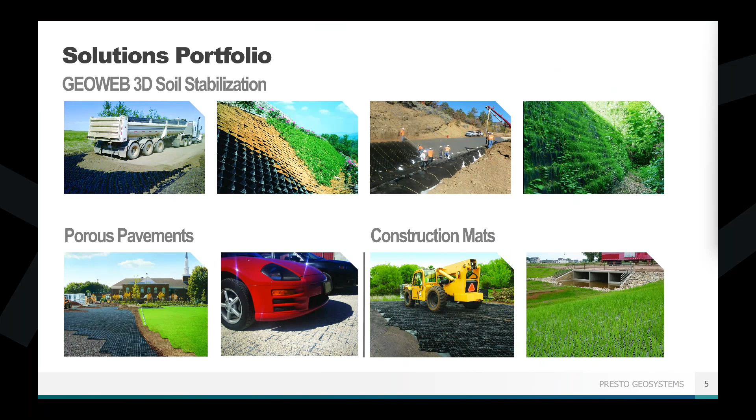So I want to talk a little bit about GeoWeb geocells and how they function, how they're going to work for what we're trying to do here. The GeoWeb system has two main characteristics, and those include the cell diameter and the cell size. The cells come in three diameters, basically a small, medium, and large. The cell wall heights are available in 5 different depths: 3, 4, 6, 8, and 12 inches. The actual cell size and cell height that you choose are going to depend on your specific project details and your site conditions.

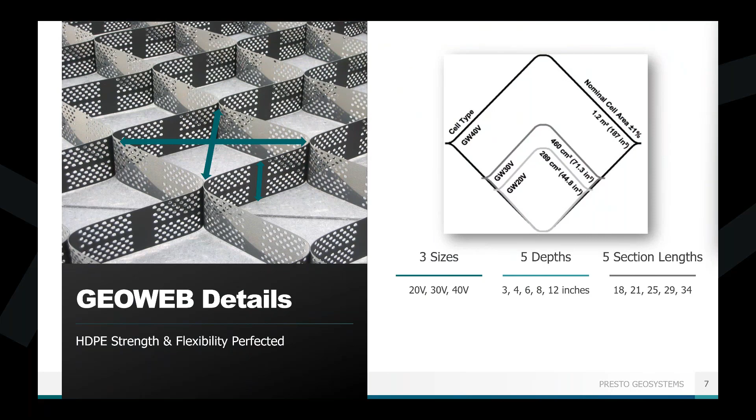Presto offers a free evaluation service, which includes your written summary, calculations, cross-sections, specifications, and other supporting documentation, regardless of your project size. This evaluation will help determine the appropriate cell size and depth for your project. To ensure your project success, we really strongly recommend against using things like standard tables or graphs. Sometimes you might have seen those out in the world, and they're a decent representation, I suppose, but they're just not very specific. Because each project is unique, especially when we start talking about having flow velocities over the system, it's really important to make sure you get one that is going to work for your site and your conditions and not just sort of hope for the best.

Something else that I want to point out about a geocell is going to be the ultrasonically welded seam. This is basically all of the connecting points of a geocell wall, and it's going to be crucial to the functionality of a geocell, how it's going to actually hold itself together. The stronger the seam strength, the better the geocell's performance is going to be. GeoWeb panels are made from 100% virgin high-density polyethylene, HDPE resin, providing the strongest wall strength while maintaining semi-rigid ductile properties.

If a cell wall is too stiff, if it's not ductile enough, if it can't move and flex, it can overstress those seams and potentially cause seam rupture, which is a project failure, something we're all hoping to avoid.

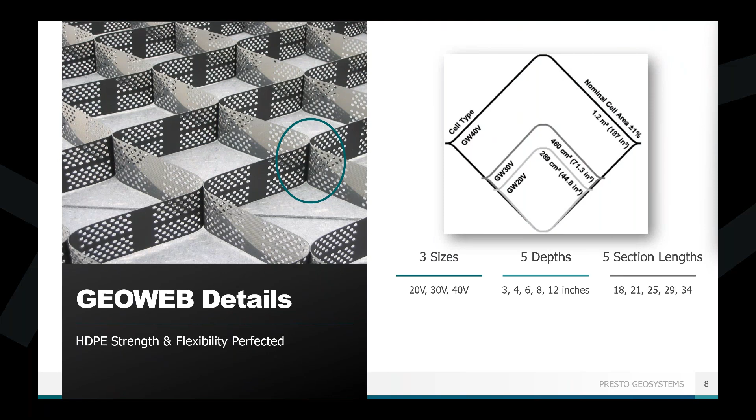So I mentioned two characteristics. The second one is actually not the panel itself, but what you put into it, the infill material. There are four main types of infill that can be used with the GeoWeb system, and what you choose is going to be based on the project type and the required protection you are looking for. Your infill types include coarse sands or granular material, topsoil, crushed aggregates, and concrete.

This will often allow for the use of recycled or on-site materials, so you can potentially reduce or even eliminate the need to import fill to your site. We can work with you and review on-site gradations to determine the most cost-effective infill material, and we'll include that in the project evaluation service that we offer.

All of the infill types can be used for the channel protection system. When used in channels, concrete is best for very, very high flow rates, which we're going to see in a little bit. Otherwise, aesthetics is probably going to be the driving factor in whether you choose between topsoil, concrete, or aggregate.

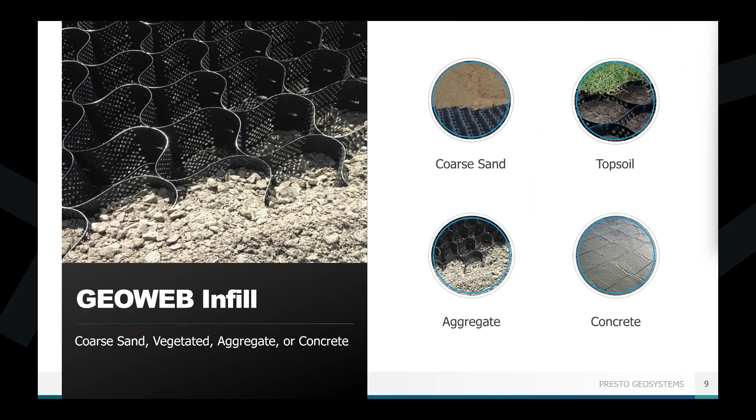GeoWeb, as I mentioned, is manufactured with a proprietary blend of high quality virgin HDPE resin, and it has proven its durability over the last 40 plus years. GeoWeb does not contain any fillers such as calcium carbonates, recycled materials, polymer alloys, anything like that. The GeoWeb system is designed to last over 100 years, with lab testing showing it can withstand up to

149 years before any carbon black degradation, even with 24-hour sun exposure. Obviously you're not seeing the sun for 24 hours a day, and we haven't quite gotten to 149 years yet, so we're working on that, but we really do stand by our data, ensuring that you can confidently build with materials that you can trust.

We are sure that the materials that we offer you are going to do what we say they will. The GeoWeb system and all of our accessories are 100% made in the USA under strict quality assurance and environmental control processes. They comply with all the requirements in the Build America, Buy America, and the Infrastructure Investment and Jobs Act. So if you are looking for federal dollars for your project, or need a certain amount of material made in the USA, all of our products and accessories meet those standards.

The first one is the Atra Key, and it is a crucial component for a fully integrated system. Atra Keys connect GeoWeb panels into a single system that covers your entire project area and significantly speeds up your installation time. Made from that durable HDPE plastic, they will last the lifetime of the project. Atra Keys ensure that the panel remains securely connected and that the GeoWeb system will not fail under anticipated loads. Their specific engineering values guarantee that the system has durability over time, avoiding the corrosion you'd see with metal staples, the failure of underperforming zip tie systems, all of that stuff you might see on competitor GeoCell offerings.

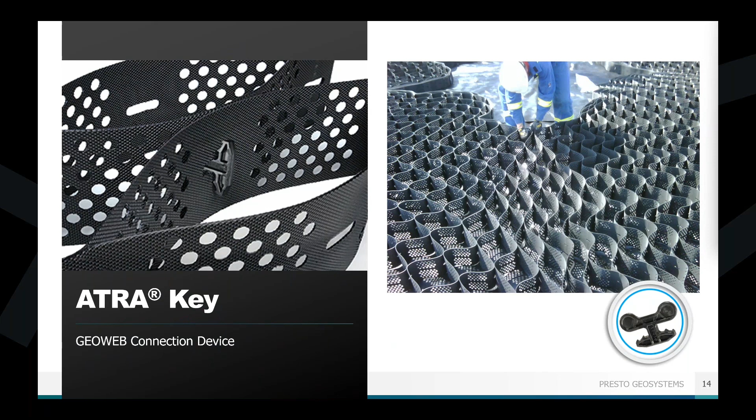We also want to look at anchorage for what you're doing with the GeoWeb system. If the GeoWeb panels are laid flat, anchorage is not really necessary because the weight of the infill materials holds everything in place. However, as your slope angle increases, you have to overcome friction, and you want to make sure everything doesn't just slough to the toe of your slope.

So anchorage is necessary. For shallow slopes, think a 2 horizontal to 1 vertical, around 26 degrees or shallower, you can use stake anchorage. We have two options: your standard steel rebar, or a stake made of HDPE, the same durable plastic material that the GeoWeb panels themselves are made of.

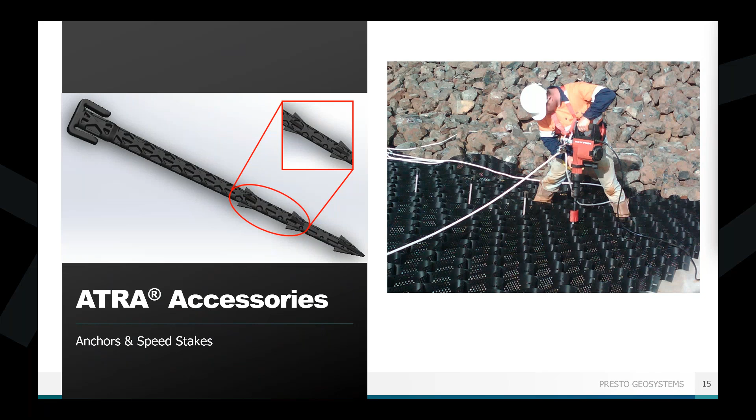Now you sometimes are going to have steeper slopes, steeper than a 2 horizontal to 1 vertical slope. You'll have other options, but you also might be putting your GeoWeb system over a geomembrane liner, something you don't want to puncture, or maybe you're in a sensitive environment where you just don't want to damage the slope face at all.

All totally valid reasons. Our second anchorage option is to use tendons. Tendons are a way of anchoring the GeoWeb system only at the crest of the slope, at the top, without doing anything on the slope face itself. So especially if you're over a liner you can't puncture, this is a great way to protect that liner without any puncture marks.

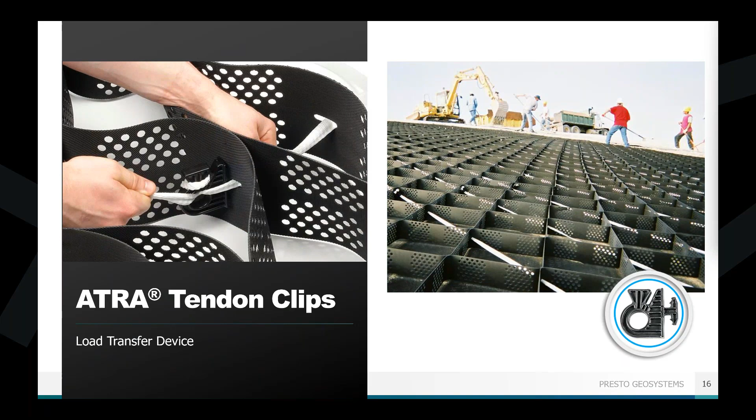There are two ways of building up the GeoWeb system on slopes and channels. The first is what we call a single layer system, where the GeoWeb panels are laid directly on the channel bottom, on the side slopes, or maybe just the side slopes themselves, and then filled in with your desired infill material. This is good for areas where the slopes are less than 45 degrees, a 1-to-1, 100% slope or shallower, as long as there's room for the footprint of the channel itself. This is probably the most efficient way to protect against erosion.

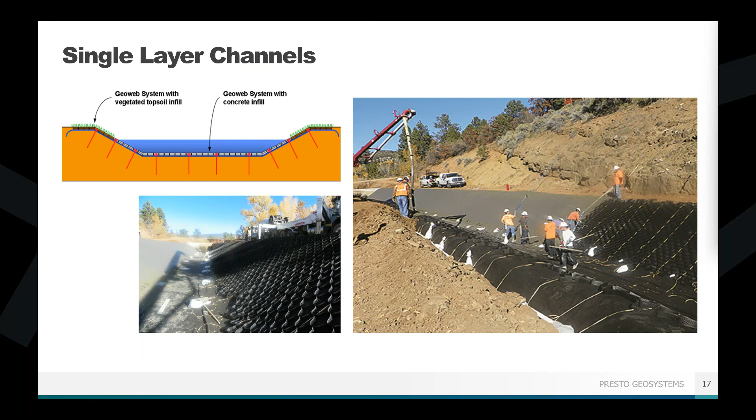But sometimes your space is limited, or your project area is already butting up against existing structures such as houses or roadways. In that case, your side slopes need to be much closer to vertical, so the GeoWeb panels can be stacked on top of each other to create a retaining wall on one or both sides of the channel. GeoWeb retaining walls can withstand the same velocities and shear stresses we're going to talk about, and they're still flexible enough to handle curves or changes in grade, creating a deep channel with a minimized footprint.

This is something you can mix and match. You can put a retaining wall on one side or both sides, you can cover the side slopes and not the channel bottom, or just do the channel bottom on one side. There are lots of different options to really meet what your site needs. It's flexible to you, not just, here's the product, make it work for your site. The product actually fits and molds into what you need specifically.

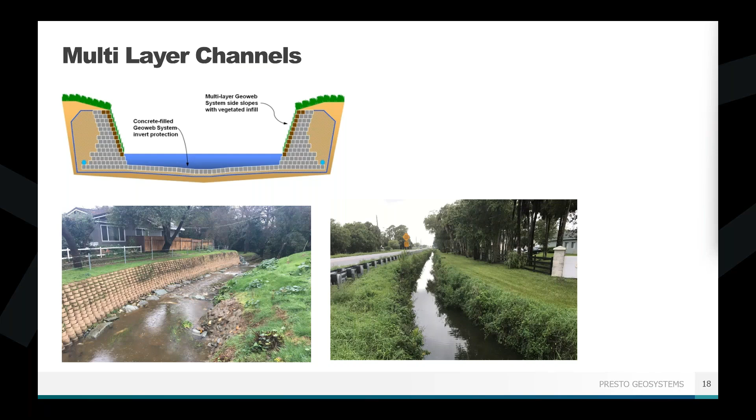All right, so we got that basic overview out of the way. Now I want to dig a little bit more into the capabilities and functions of each of the infill types.

So we're going to talk about each of the different main categories of infill. We're going to start with vegetation infill.

One of the best things about the GeoWeb system is how much trust we have in the actual system working, because we have the experience and research to back up what we're saying. One of our biggest tests was with Colorado State University in Fort Collins, Colorado, under the direction of Dr. Chris Thornton.

CSU is considered one of the top hydraulic research facilities in the world. It has a pretty unique location underneath the Horsetooth Reservoir with a couple hundred feet of static head, so it can achieve extremely high velocities and shear stresses in their research flumes, something you won't see in a lot of places because they don't have the power behind it. It's a really great testing facility, and Dr. Thornton is very widely respected. We're very happy we were able to spend some time with him.

Vegetated infill testing was performed with essentially two objectives in mind. The first was the ability to withstand high velocities and high shear stresses—the main components you think about when water flows over an area. The second objective was to compare the performance of a topsoil-filled GeoWeb system against riprap or other conventional solutions.

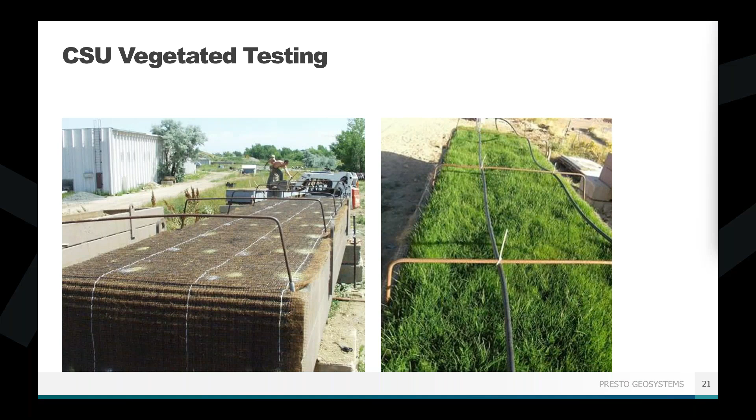This testing consisted of filling the GeoWeb panels with topsoil and putting a surface protection—in this case, a turf reinforcement mat on top to allow for vegetation growth. It's a pretty typical cross section. We were able to run those tests in a couple of their different flumes at a couple different slope angles and velocities, mixing and matching those conditions to figure things out.

We got some pretty impressive results. It held up really well, even against turbulent flows—thinking around corners, going around rough terrain, that sort of thing. A lot of people tend to think a vegetated channel can't handle significant water flow, which is true when it's an unreinforced channel with just natural topsoil and vegetation growing.

Something to keep in mind: there are lots of different types of grasses, and choosing what grows in your area and climate is going to be the most important thing. But there are some hardier varieties of grass that may work better if you know you're going to achieve some of these higher velocities. I urge you to reach out to your landscape architects, people who understand different types of grasses. I'll admit that's not something I'm super familiar with, but you can talk to us about it or to somebody who knows what's going to grow in your area.

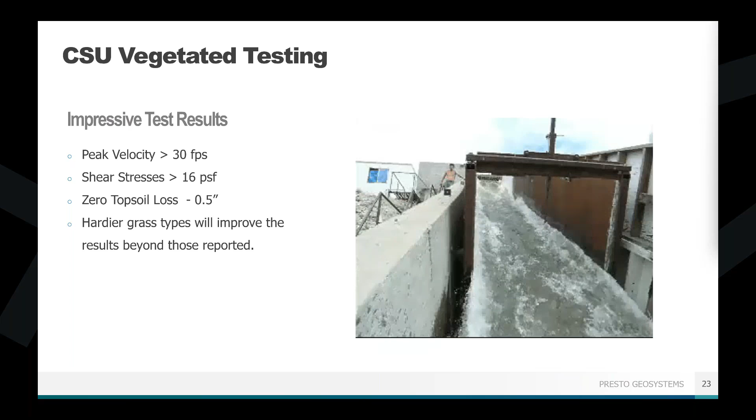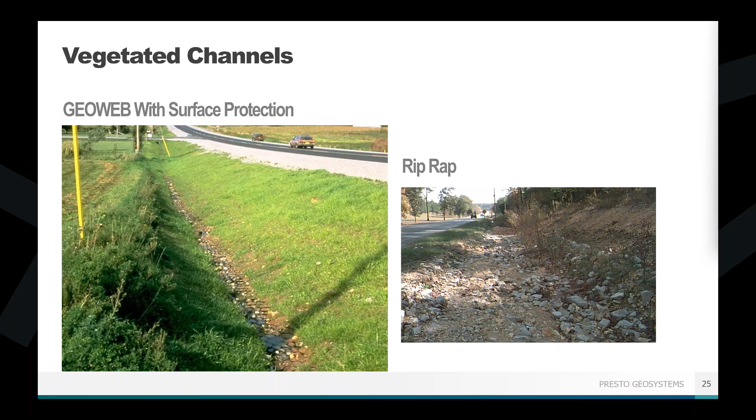Then you have the GeoWeb system here on the left-hand side, with nice green grass growth. Everything's contained—you don't have to worry about it getting washed away. It's going to look like this before and after your storm event. This was a case study that we did.

The GeoWeb system also works great along embankments that see flow from the top to the bottom of the slope rather than along a channel bottom. In this case, this was an embankment on the dry side of a pond that would see hopefully infrequent overtopping, but it was made of unstable soils because it was at an active gold mine in northern Canada.

Had some variable slope lengths and face angles, so it wasn't just a nice perfect embankment - it was sort of rough looking. This was up near Toronto, a cold weather environment, and the GeoWeb system stands up well to snow, frost heave, and ice. In this case, an access road was also going to be built above the embankment, so the slope had to become stable enough to support the expected road traffic. When used as an embankment, the GeoWeb system protects the slope from water runoff and overtopping with no loss of vegetation along that slope face.

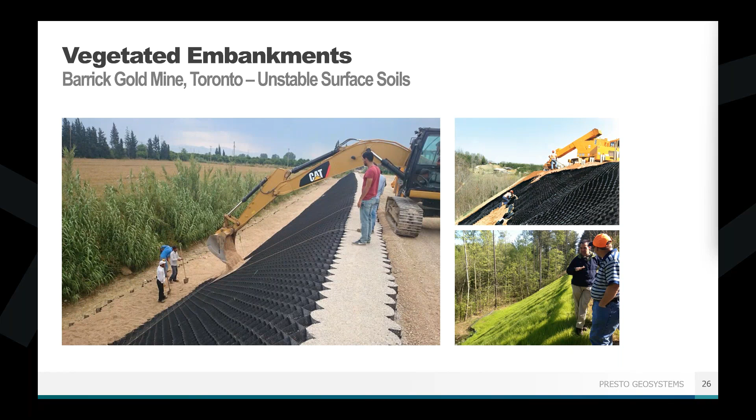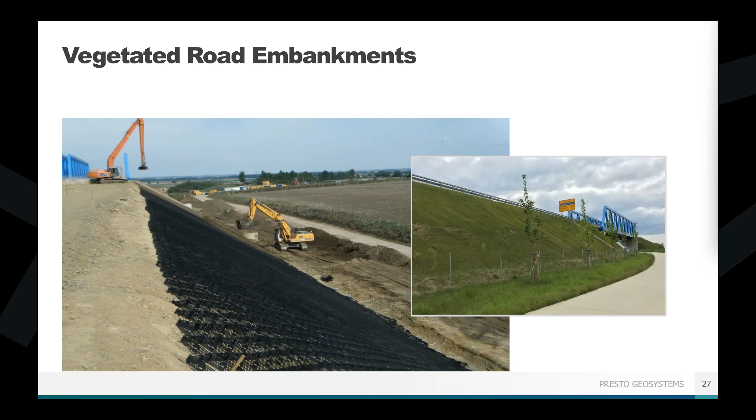This slope here was alongside a road in Ohio, a pretty common problem solved with the GeoWeb system. Erosion and washout of soil slopes onto road surfaces is a problem in many locations. In this case, you cover that slope with the GeoWeb system, fill it with topsoil, and allow vegetation to start growing. Now you don't have the concern of constantly coming in to replace the soil after each storm event. Here they chose to hydroseed on top of that soil to help promote vegetation growth a bit faster. You can also use things like erosion control blankets or coconut matting.

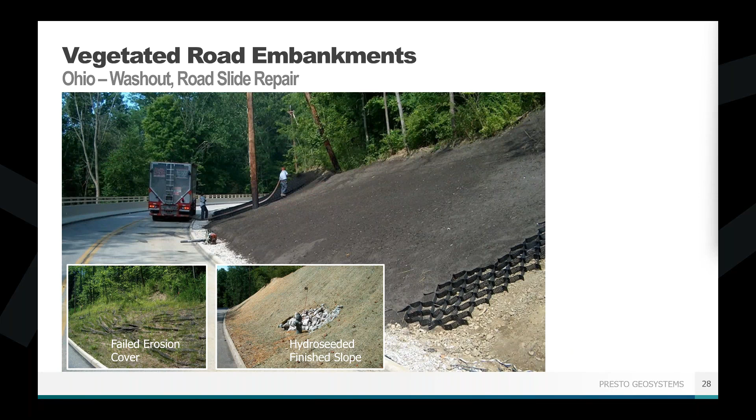There was a project down in Florida where the GeoWeb system was working along a shoreline of a hurricane stormwater channel. They were placing the panels along the shoreline to help protect against erosion due to water movement and wave action. This diversion channel was collecting hurricane water, so it would fill up very fast and be very turbulent as all that water moved in with the hurricanes. It needed to withstand that turbulent water and the rise and drawdown as water came in, filled the diversion channel, and eventually dissipated. There was obviously infrastructure on all sides of this channel, so they wanted to make sure it stayed in place without any damage.

The GeoWeb panels here were placed both above and below the normal water line for this channel. The panels need to go below that water line to ensure they don't get lifted up due to wave action or the rise of water in the channel. This makes sure you're protecting the entire shoreline all the way down to the channel bed. The area does not have to be dewatered to do this type of installation - this can be a wet installation.

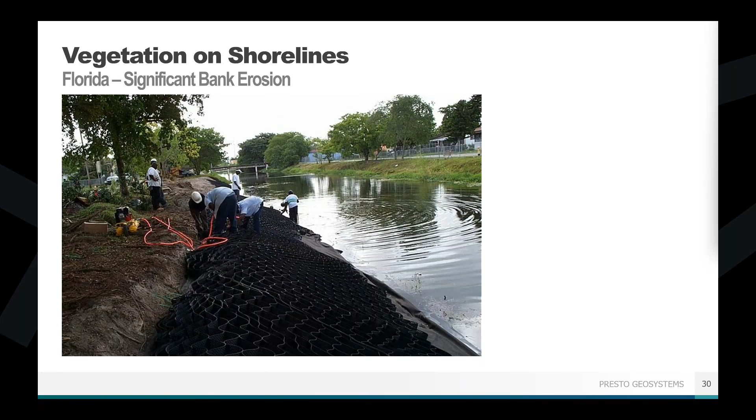The GeoWeb panels can basically be thrown into the water and then staked onto the slope face, making sure everything is held in place, and then you still dump your infill material in same as you normally would. Once everything is in those GeoWeb panels, it's not going to get washed away even when underwater continuously. Here you see that final surface after vegetation has been established.

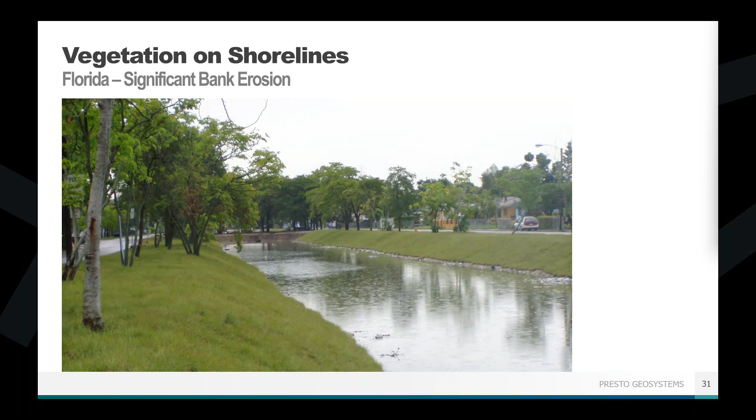In this case, they chose some water-loving vegetation, but also did a mix and match where they put stone underneath the main water line. Everywhere that was going to constantly be underwater, they filled it in with stone because grass doesn't like living underwater, and had grass above it so it looked nice and blended in with the surroundings. But even now, as the water rises in this channel and rises above the stone and gets to the vegetated section of the GeoWeb erosion protection system, it all stays in place and doesn't go anywhere.

One last thing I want to mention about vegetated infill: you can put it over those geomembrane liners I mentioned, but the GeoWeb panels themselves are deep enough to hold a sufficient amount of topsoil to still grow nice, healthy vegetation, even over a liner, so it's not going to penetrate into the native soil in any way.

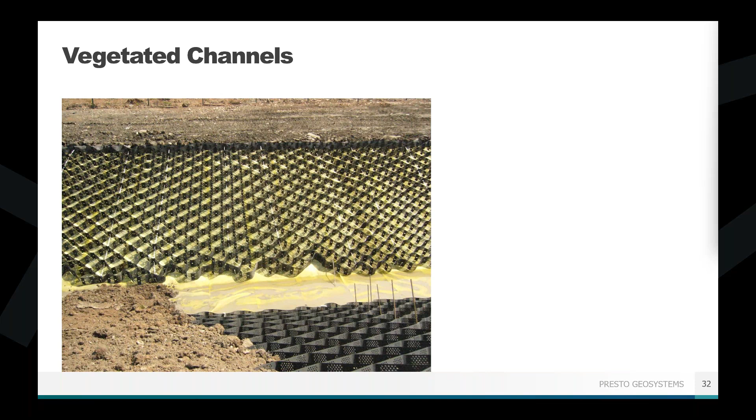Here you can see that bright yellow liner underneath. The GeoWeb panels were just on the side slopes here - they didn't feel the need to protect the bottom of this particular channel, but it all grows in very nicely. You can see they went with coconut matting to cover the system while vegetation grows. But large vegetation is in here, with grasses and everything growing. It still looks very clean and natural, and you have enough soil contained within the GeoWeb panels for good vegetation growth, even when it can't reach the natural subgrade.

Now you can have all this water flow through this diversion channel. It's not going to go through because there's that liner. The liner is protected because you have the topsoil on top of it. All sorts of good things working together here.

In terms of vegetation maintenance, if the grasses start growing or you have larger flowering vegetation, keep it with your standard lawn maintenance plans. You can ride a lawnmower, either a walk-behind or a ride-on, right over the top of these panels, and just let it grow like natural grass would. Don't make it more complicated than it has to be - very easy, very low maintenance. Honestly, you're not going to know the GeoWeb panels are under here once that vegetation's in place.

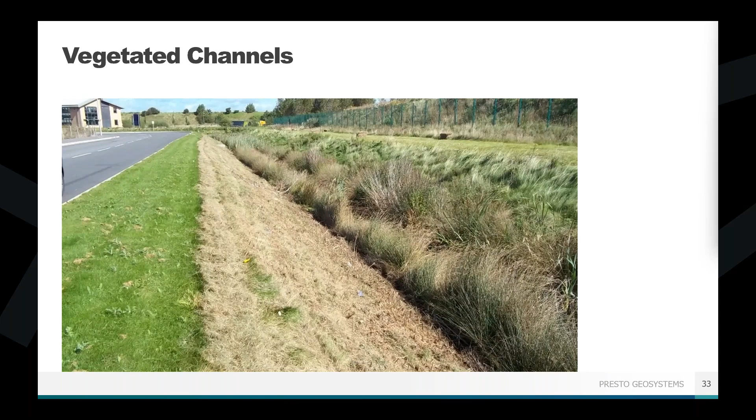One more project I want to mention: this one was out in Sacramento, California. This was a concrete lined ditch with a culvert as well, and they were directing a really concentrated flow of stormwater runoff into the natural bank of this creek.

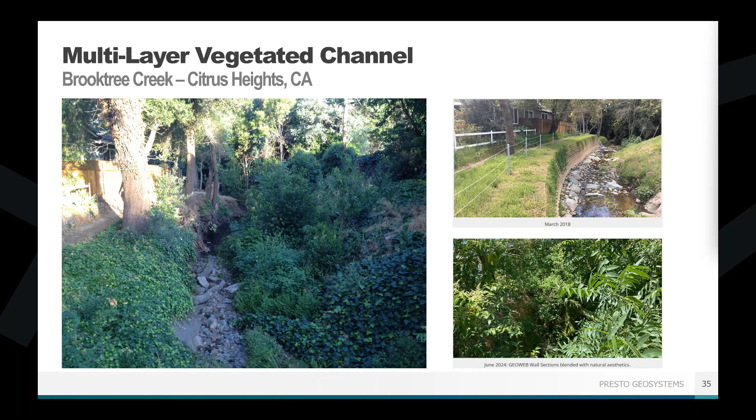So it was not only causing severe erosion in places along the creek, it was exposing the roots of some mature oak trees. The erosion had caused those banks to erode and move to the point where they were becoming dangerously close to the homeowner's property, and they were starting to worry about undermining.

This project was designed to have construction start by unfortunately removing the oak trees with exposed roots that couldn't be saved, but then trying to save the rest of them by packing them back in with soil. They actually chose to use the retaining wall option on that side to give as much space as possible to try and keep those trees.

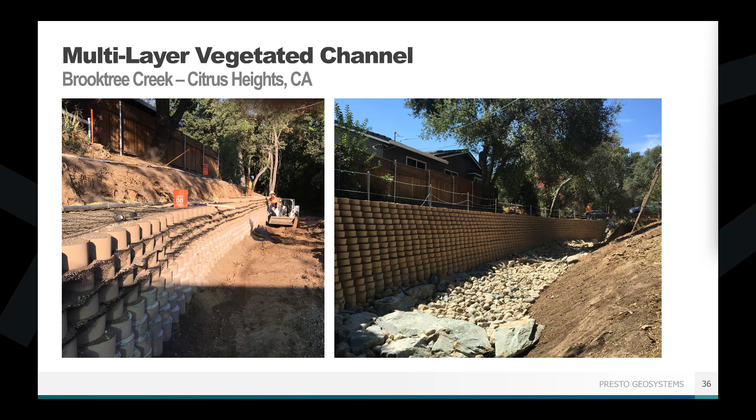They were able to stack the GeoWeb panels vertically on top of one another to create that retaining wall, and then decided to just do the single layer system on the other side because they didn't need the vertical wall there. They left the concrete and stone base of the channel there so that it would serve as a natural creek bed, and then let the vegetation come in.

This is a great way to have still allowed the runoff through this system, not reducing the amount of runoff in any way, but now you don't have to worry about encroaching on the homeowner's property. Those trees are not going to have their roots exposed, so they have a better chance of living a long time. All good things that we're doing here.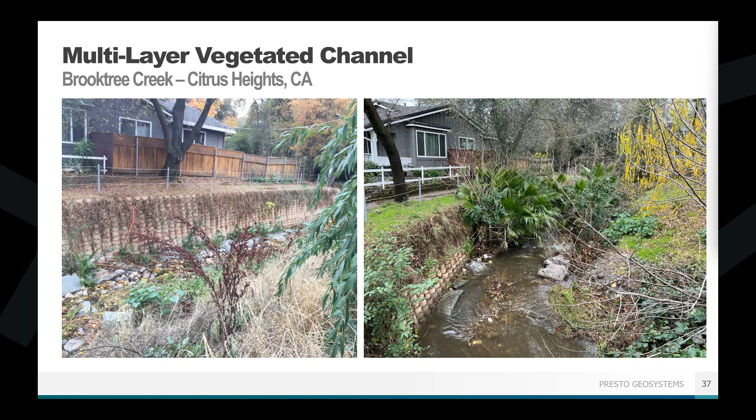All right, so that was vegetated infill. The second one we're going to go to is aggregate infill, so stone infill. Again, we did testing at Colorado State University, and the main objective here was to determine how much the GeoWeb system can aid in reducing the stone size from your standard riprap stone down to a regular crushed aggregate stone.

So we looked at how well the stones would stay in place during the tests to determine the rock size that would prevent washout. Because frankly, the system doesn't work if a stone can get picked up by the flow and just wash downstream. It's got to be able to stay confined within the cells of the GeoWeb panel.

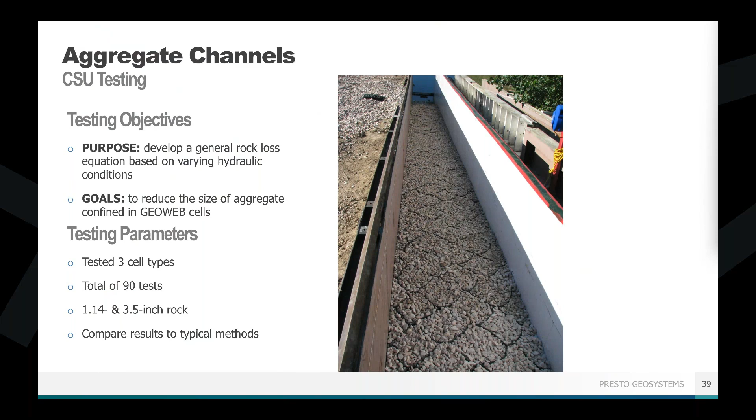The results here were pretty impressive as well. We were able to get up to 18 feet per second for max velocity and a max shear stress of 16 pounds per square foot. People who have a good head for numbers might remember the vegetated system could handle up to a 30 foot per second velocity, so a pretty significant difference between topsoil and stone.

But the difference I want you to think about is a whole lawn of grass, all the roots interconnected, all those blades of grass held into the soil, versus a single rock. So you can see why those are different parameters you're working with. With the stone or aggregate infill, we wanted to make sure the stones themselves weren't getting picked up and washed away. We didn't want to empty out the cells because we were using stone that was too small.

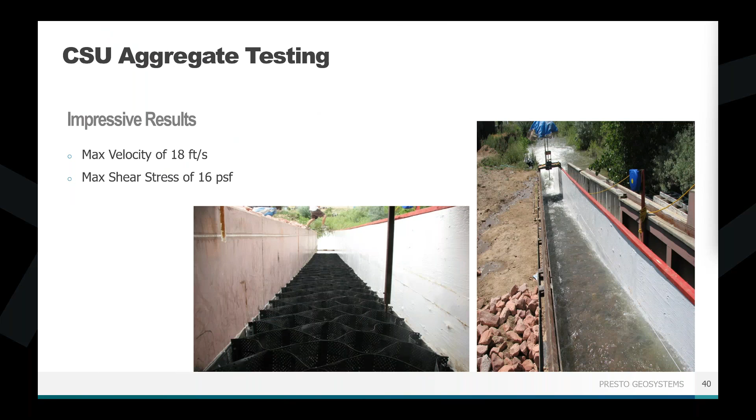We're more than happy to talk about these in more detail if you're interested. I'm not going to get into a great amount of detail today, because the idea Dr. Thornton put together was to create a design tool based on a regression analysis to compare the reduction in crushed aggregate confined within the GeoWeb panels to your conventional riprap stones.

So the tool is based on all of that testing data, and it allows us to predict the rock loss and rock size based on the specific hydraulic conditions of your site. Essentially, that means we can recommend the appropriate cell depth and rock size for an individual project, so you can be confident that the stone placed in the system is not going to get washed away.

You can't see too much here, but it does tell you we're using, in this case, a D50 of 2 inches - so a 2-inch sized crushed aggregate - compared to either a 10.3 inch riprap stone or a 16.7 inch riprap stone, standard riprap sizing options. So a reduction between 5 and 8 times the stone size. Really significant, and definitely going to save you on material costs.

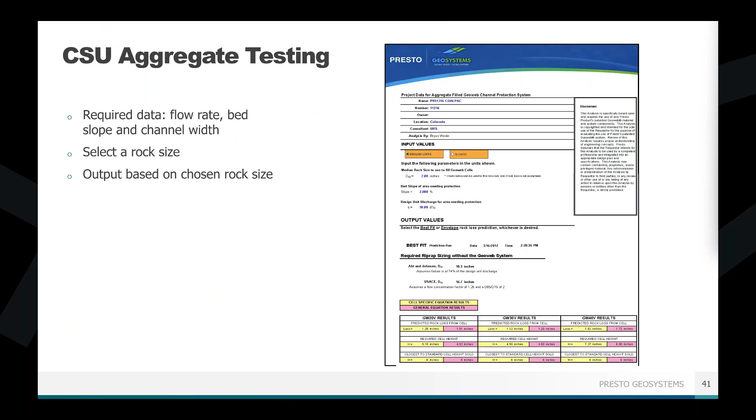All right, some case studies. Minnesota DOT used the GeoWeb system to help stabilize the surface around bridge abutments and along railroad tracks. The flexible nature of the GeoWeb panels means it can easily contour to that slope face and around obstacles such as piles and bridge abutments.

With that system in place, water erosion is prevented around those abutments, reducing maintenance costs. This project used a mixture of topsoil and aggregate infill - aggregate below the bridges where vegetation would have difficulty establishing. You see it all the time driving down highways: under bridges is either stone or concrete, and the rest of the slope is nice green grass. In this case, they filled the GeoWeb with stone under the bridges and with topsoil and vegetation where it could get sunlight.

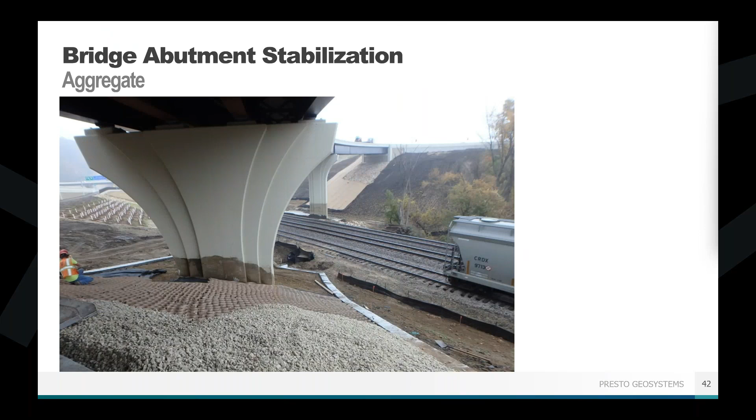Another project was for the Gila River Indian Reservation just south of Phoenix, Arizona. Heavy runoff from intense storms was leading to erosion and flooding around some adjacent subdivisions. Several existing embankments and channel sections had failed under some recent 100-year storm events. Repair time was critical to reduce flooding and prevent runoff that could damage those residential areas.

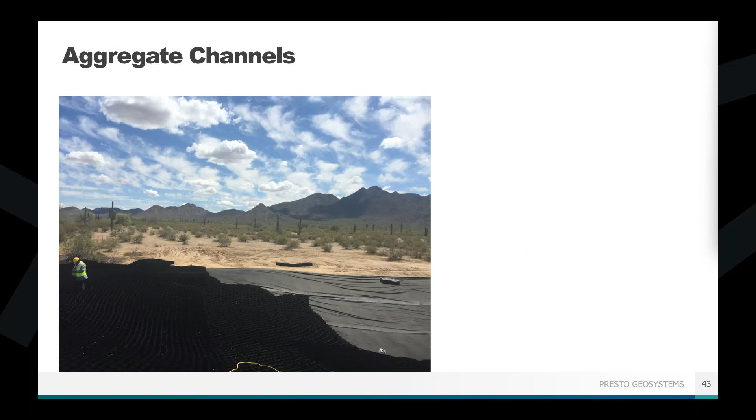The channel area was cleared of any existing vegetation, scrub brush, that sort of thing, and then the sand subgrade was graded and compacted. To prevent infill loss, they actually chose to use a non-woven geotextile underneath the GeoWeb panels.

This helps keep the stone in the panels and prevents them from migrating down into the sand subgrade over time. It acts as a nice separation layer and keeps everything where it's supposed to be.

This was a wide, shallow channel with 3 horizontal to 1 vertical side slopes, so really quite shallow. It was actually approaching 100 feet wide in some locations - really wide, very shallow.

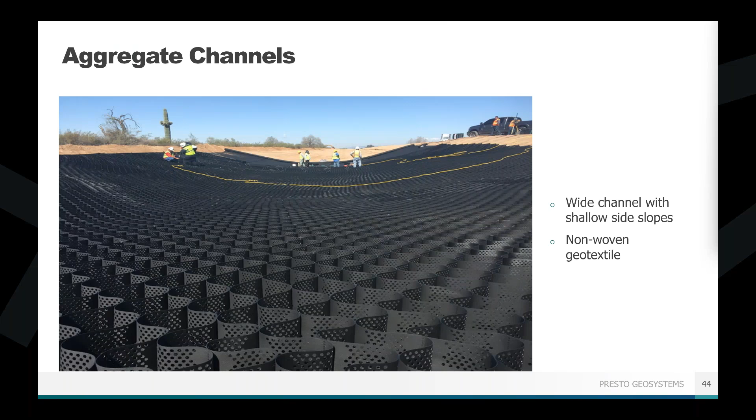They were able to use the stake anchorage option to hold everything in place.

One of the nice flexible things about the GeoWeb system is the ability to change the depth of the panel mid-project. In this case, they had an 8-inch panel on the left side going down to a 4-inch panel on the right side, because they had higher flows on the upstream side that were slowing down and getting reduced enough that flow could be contained by the 4-inch panel. This saved on material costs, less GeoWeb panel, less infill material, and easier installation, so you don't have to be stuck with the extra thick section the whole way through just because you have 1 or 2 areas of high or turbulent flow.

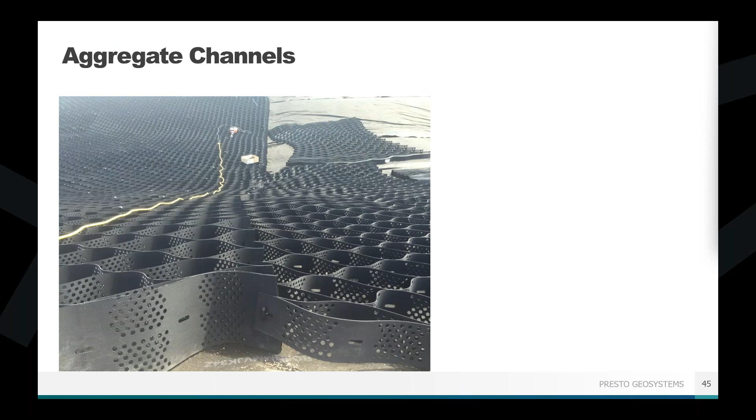They also had some outfall pipes coming into this area, which was where those turbulent areas were that had the thicker section of panel. The GeoWeb panels fit up nicely around those outfall pipes so you don't have potential areas of washout or erosion directly underneath the outfall where you have turbulent flow, potentially very high flow during storm events. They were able to cut the GeoWeb panels to fit around these obstacles and then flow them into the channel to meet up with everything else.

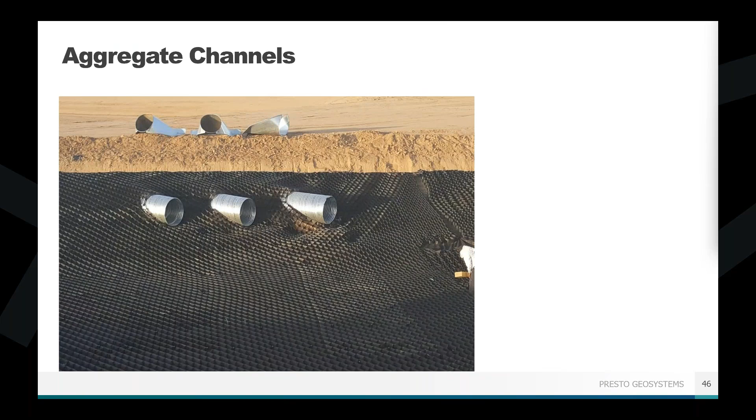It's a pretty easy installation once they got into the swing of things. This crew was installing about 2,000 square feet of GeoWeb sections per hour, with a 4-man crew plus an operator to fill in the stone. You can see some of that work happening here.

The infill here was actually waste rock from a nearby quarry, so not great quality, not always known exactly what the gradation is. But that's one of the great things about the GeoWeb system - you don't need high quality engineered stone. You can use lower quality or salvage stone because it's still going to work and be confined within the GeoWeb panels, which are carrying a lot of the load, so you don't need the greatest stone that's ever existed.

Also, one of the great things here was that you can actually drive on top of this when it's filled in with stone like this, acting as its own access road. You drive on top and then fill in the stone in front of you, keep filling in the panels, but driving on them as soon as you've already filled them in. This is really advantageous for installation sequencing and speeding up installation time. In this case, having a quarry nearby meant they didn't have to haul material from far away - lots of little benefits that all add up to something that worked out well for this location.

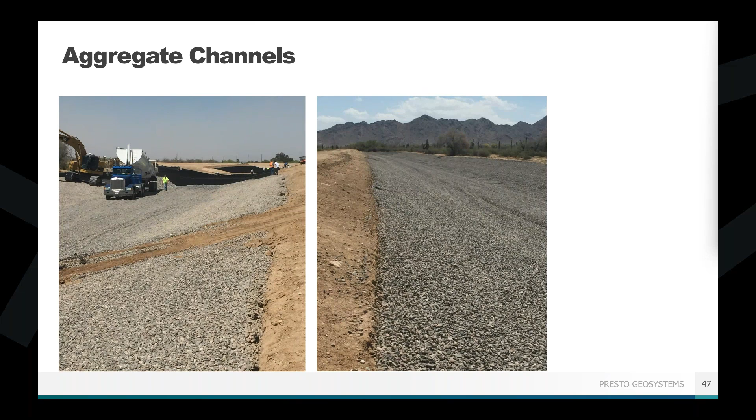Here's what that looks like under typical flow conditions. They had a couple drop structures designed throughout the channel to help reduce velocity before it reached the end of the channel, where it went into an unprotected, natural state of the channel. So the GeoWeb system was no longer covering the bottom there, but the velocity was low enough that there wasn't concern about it tearing up and causing erosion to the natural channel.

With the aggregate protection system, there is little to no maintenance required. Since the aggregate is confined, you don't have to come back and replace it or worry about it getting washed away during storm events. The channel is large enough to accommodate storms without overtopping, so you don't have to worry about it falling over the sides or anything like that.

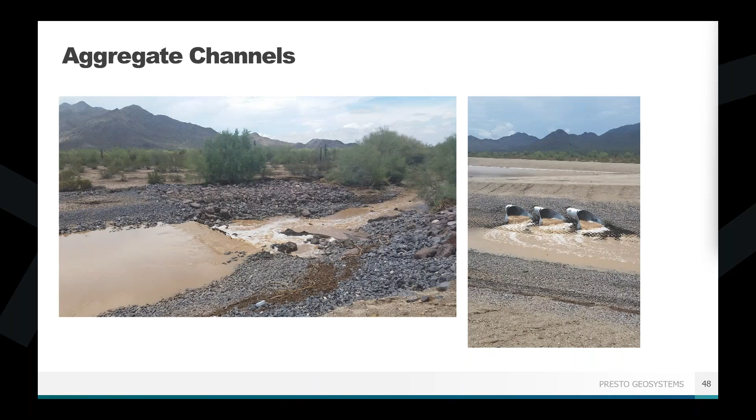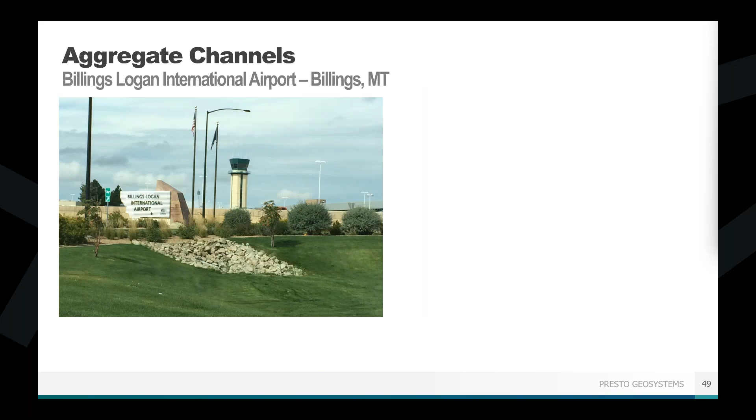Here was another project at the Billings Logan International Airport in Montana. It was built on top of sandstone rock with little to no topsoil, so even when vegetation was growing on this site, high velocity runoff areas caused erosion issues that needed to be addressed. The GeoWeb system was chosen, filled with stone infill designed to protect this channel from erosion for up to 100-year storm events.

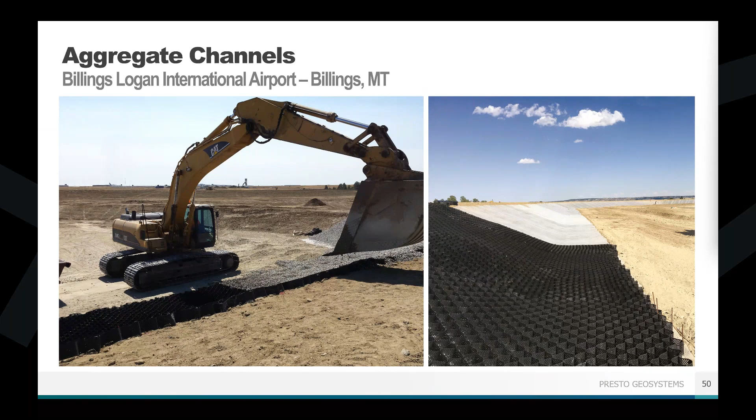The open graded aggregate allowed stormwater to infiltrate during low flow times into the groundwater system. Two detention ponds were also built to help control stormwater runoff flowing from the channel, and the GeoWeb system was installed over a geosynthetic clay liner to help protect the banks of that pond, adding a little extra erosion resistance.

This airport was sloped at 2%, a very shallow grade for a large stormwater pipe system. That slope and the 48-inch pipes produced some pretty high velocity storm events. The challenge was lining those open, high flow channels with a pervious material that would not create ponding but still provide erosion control. The GeoWeb system with clear stone fill was a good fit for that desired infiltration over time.

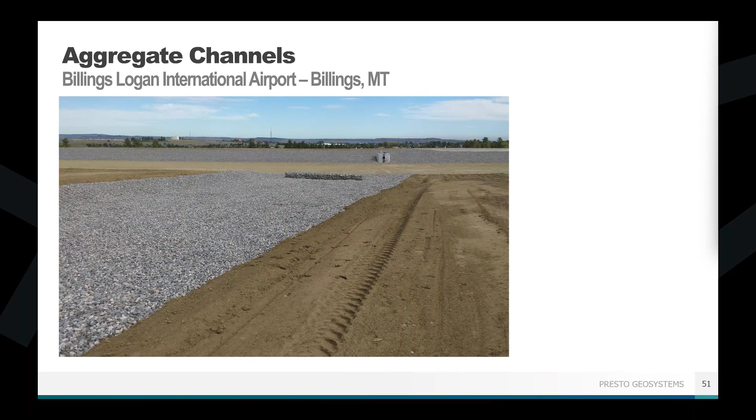All right, our last infill type - I'll try to go a little quicker now - is concrete, which gives you impervious cover to your channels. Again, testing was done at Colorado State University, where we ran a couple different tests.

The concrete filled GeoWeb doesn't require any additional reinforcement. You're not putting rebar in there, you're not doing fiber reinforced concrete or anything like that - you're just pouring your concrete directly into the GeoWeb panels.

They actually maxed out the flume at CSU at 36 feet per second. Water was overtopping and coming out the top of the flume, which they said had never happened before and has not happened since. We are the only product to ever actually overtop and max out their flume.

So the testing shows 36 feet per second, but we are very confident and have experience with significantly higher flow velocities over concrete filled GeoWeb, which isn't super surprising. Concrete itself is intended for those very high flow velocities, but filling the GeoWeb panels with concrete is a great way to reduce the thickness of your concrete.

You can go as low as a 3-inch section all the way through, and it's a great way to incorporate other geosynthetics such as wicking layers or geomembrane liners without having additional infrastructure. This type of system, concrete filled GeoWeb, is comparable to things like articulated concrete blocks, ACBs, TRMs, ECBs, that sort of thing. So it's still in that category, in that vein of geosynthetic reinforcement, but it gives you all of the benefits of concrete.

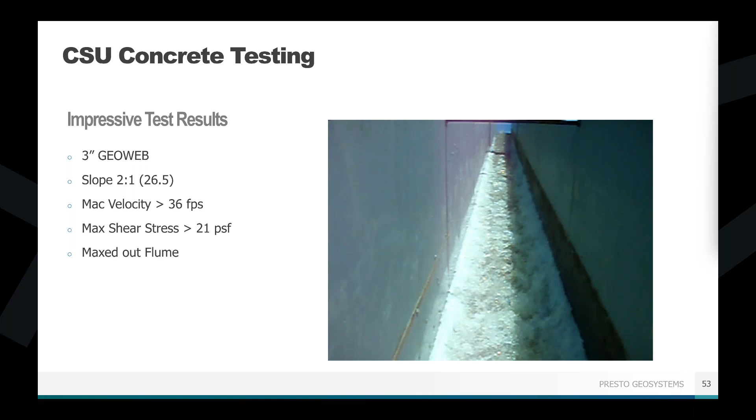Concrete filled GeoWeb is best when you know there's going to be very fast water flow. This was a channel project at a train intermodal yard down in Texas. The GeoWeb system was actually a value engineered option that came in to replace a 12-inch rebar reinforced channel with a 6-inch deep GeoWeb panel.

The GeoWeb also went up on the side slopes and was only 3 inches deep, so they had that transition from a thick panel where the water flow was going to be to a slightly thinner panel in areas that weren't going to see high water flow. This was a great way the GeoWeb system was able to save the owner a couple million dollars - not going to argue with that. But more importantly, it sped up construction and allowed the yard to be in service significantly quicker than originally planned.

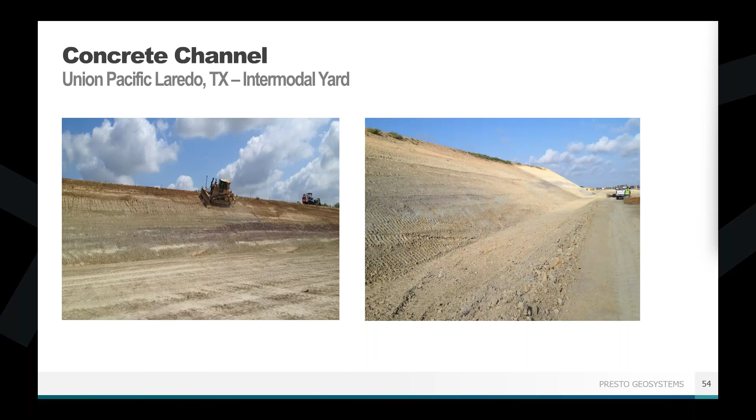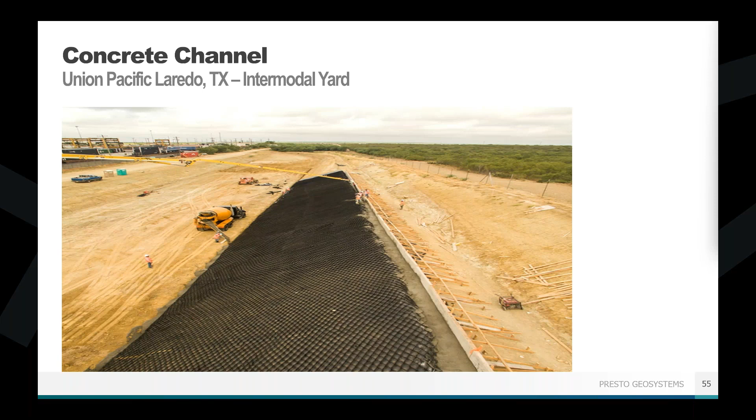The side slopes of this channel used 3-inch deep GeoWeb panels anchored with stakes because the slopes were relatively short and flat. The bottom of the channel used 6-inch deep GeoWeb panels so it could support clean out equipment without fear of damage. The slightly thicker concrete was able to support those heavy vehicle loads and withstand the water flows. Here you can see it all going in.

One of the neat things about this system with the geoweb filling in with concrete is that the panels act as their own formwork. So there's no need to build additional forms, which can be tricky on slopes and increase your construction time and materials. The concrete is poured directly into the geoweb panels from top to bottom, and the cells hold that concrete in place and prevent it from slumping or creating areas of uneven thickness. One of the great benefits is a consistent concrete thickness across your entire project, because the concrete is screed flush with the top of the geoweb panels. So you know it's always exactly 3, 4, or 6 inches deep.

But this is still a concrete structure, so you do have to account for pore pressure buildup. You can drill weep holes through the set concrete, or install weep piping through the panels before you pour the concrete. Whatever you need to do, just don't forget pore pressure - that will be the death of all engineers at some point. So geoweb filled with concrete is great, but still subject to water pressure.

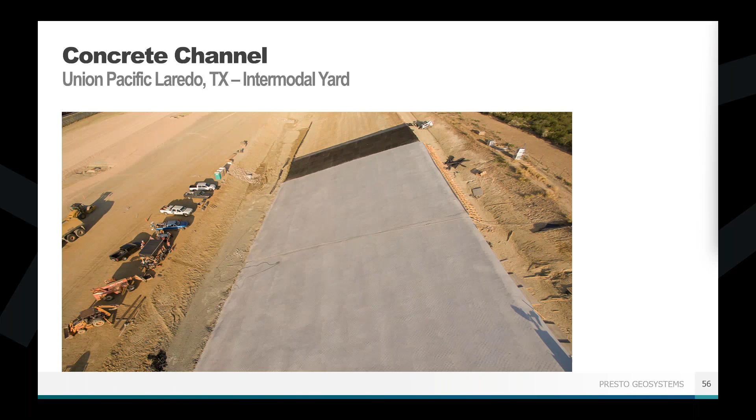Here's what that looks like from the sky. I thought that was a pretty cool thing - it was over 1 million square feet of geoweb. You have the channel down the middle where the water flow is going to be, and then up and over the sides for erosion protection in case of overtopping. This got that rail yard back in service significantly faster than planned, and now it has a safe way to contain all of the water that would come through.

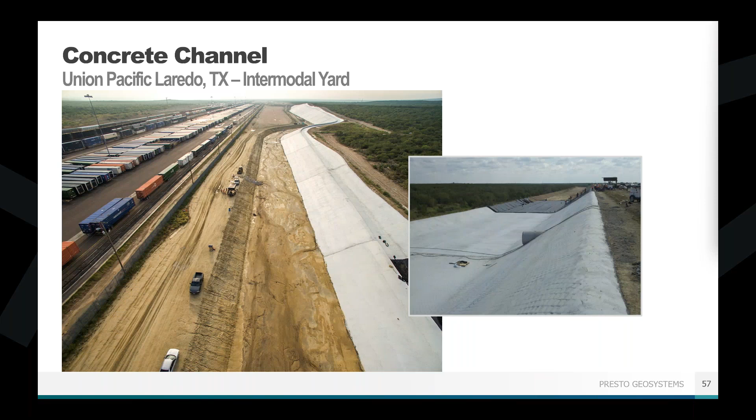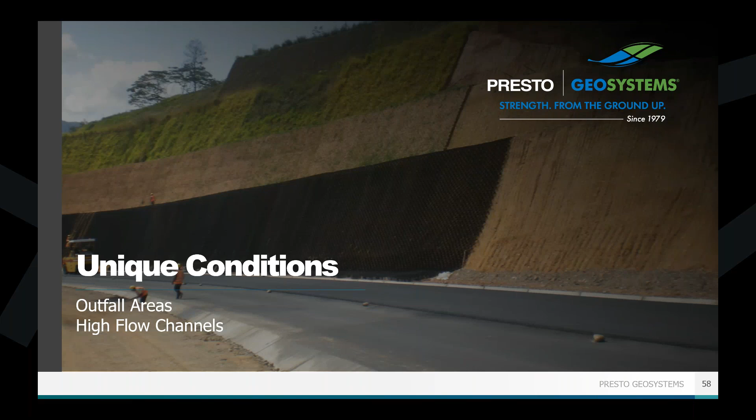One last thing we're going to cover today are some unique conditions or special cases - outfall areas and very high flow situations, somewhere you might need a little bit extra. Outfall areas can be challenging because they typically have pretty high velocities and shear stresses, typically higher than the channel as a whole. And the water in these areas is usually turbulent as it comes out of the pipes, rather than the laminar flow you'd hope to see in the rest of your channel.

Using the geoweb system can help mitigate some of these concerns, especially if you use concrete, because that turbulent flow and those high velocities are just not going to be an issue with concrete filled geoweb. The option to mix your infill types is really beneficial here - so do concrete around your pipe outfalls and then transition to stone or topsoil once you've gotten away from those turbulent areas to get that more aesthetic appeal.

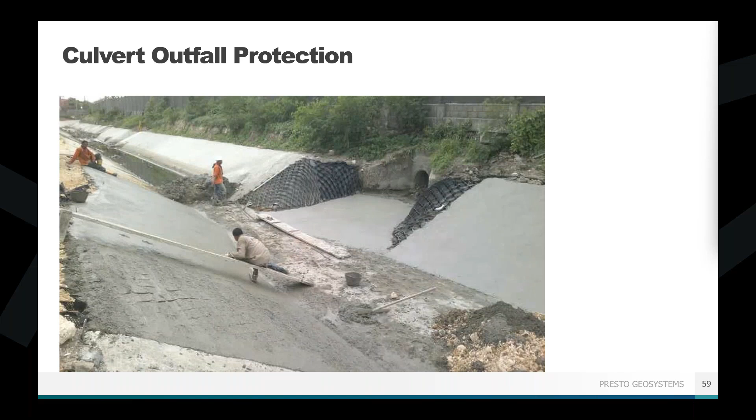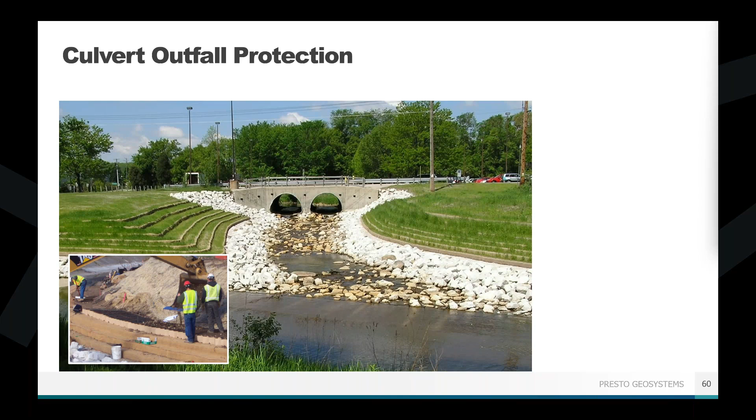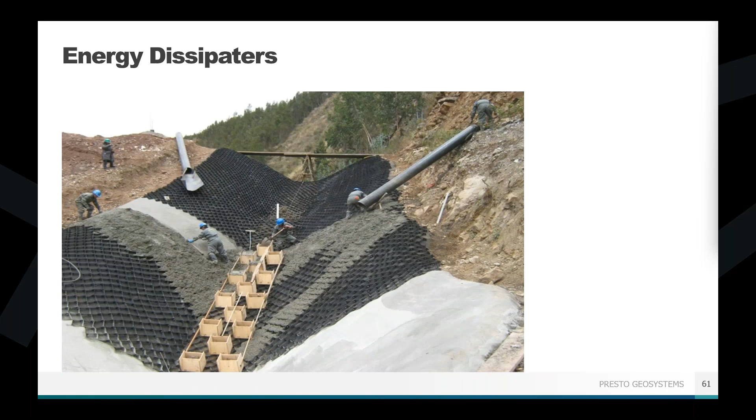The other special condition is very high flow situations where that flow needs to be reduced by the end of the channel, and that's where you include energy dissipation. Dissipators can be added to any concrete filled geoweb panel - they can't be added to stone or topsoil because they need to be anchored into the channel a little better, and concrete is the way to go with that. Plus, in a high flow situation, you're going to need concrete anyway. They can be as low tech as just throwing some boulders on top and grouting them into place, to something a little more uniform, like this nice patterned dissipator you have here - you can see how nicely that looks. They can be placed on those very steep slopes, same as the geoweb panels. So basically, if a geoweb panel can be placed there, dissipators can be incorporated into the panels.

Utilizing a tiered system on the slope like this can limit the height and angle of the channel while still containing and directing that water down slope. So something to consider if, in this case, this was tens of meters tall—a very tall slope. They were able to terrace it a little bit to break up the water flow.

But in this case, the dissipators were able to be put in with that concrete, so they're incorporated into the Geoweb system. They're not a separate piece, so they're not going to break off and fall away. It's all a single concrete monolith.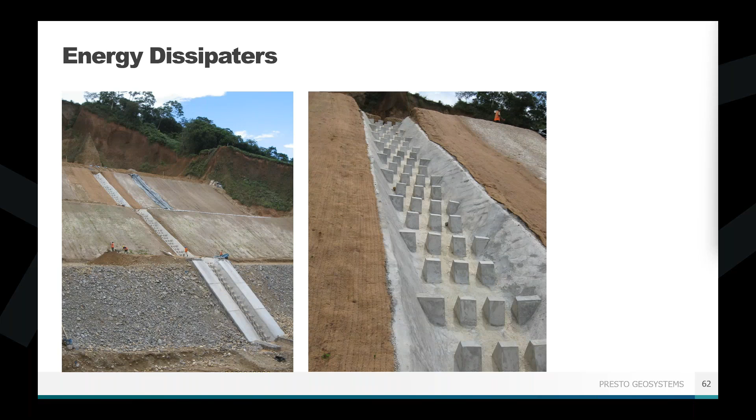The number of dissipators, their size, and their spacing are really going to depend on your anticipated flow and channel conditions. There is no one right way to include energy dissipation, but it's something myself and the engineering team here can help with on a case-by-case basis. So if you know this is something you're going to need for your site, definitely reach out to us. Happy for the challenge, that sort of thing.

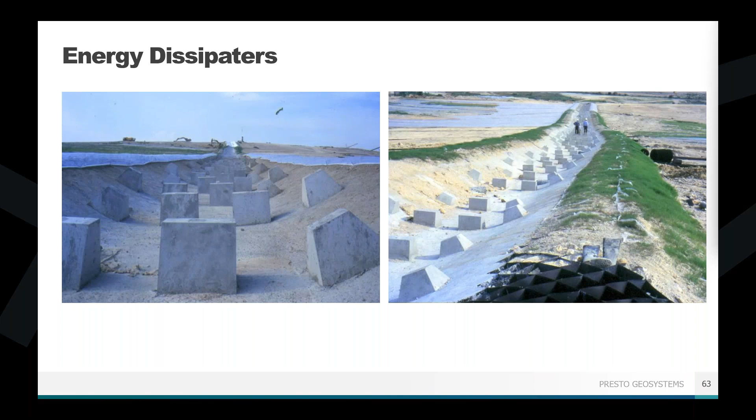We want you to know that it can handle these types of things because you might not think of it right away. But that's my show.

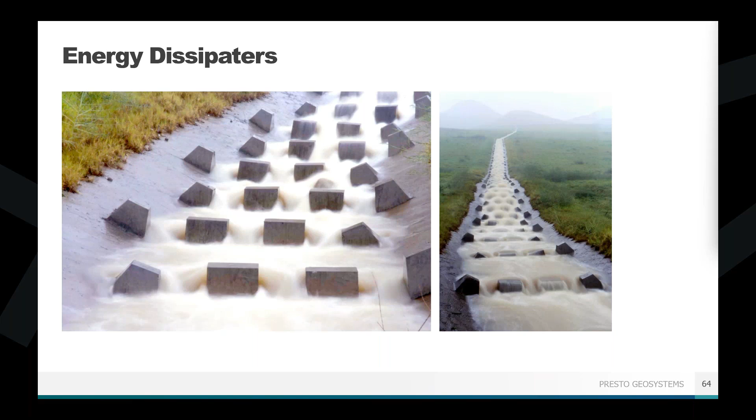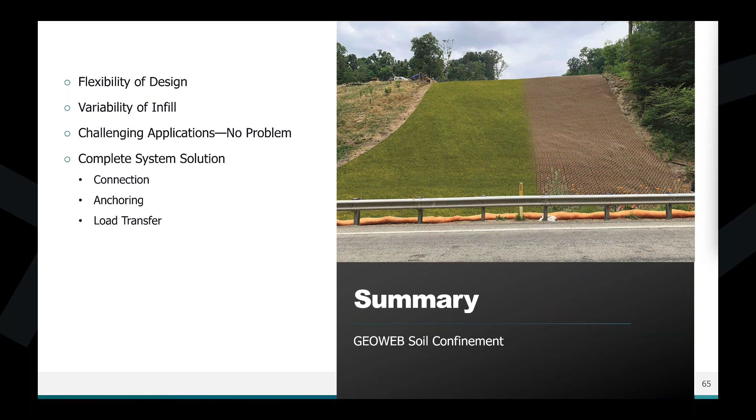In summary, the Geoweb channel protection system has great flexibility of design and a variety of infill materials to meet your project needs—you can go with topsoil, aggregate, or concrete. You can have protection against surface erosion all the way from shallow intermittent flows up to high velocity, constant water flows, that sort of thing. And we are backed by over 40 years of experience and extensive research and testing to validate what we're offering.

And I mentioned it—if you are interested in the testing we did at Colorado State University, definitely reach out and we can give you your copy of this research.

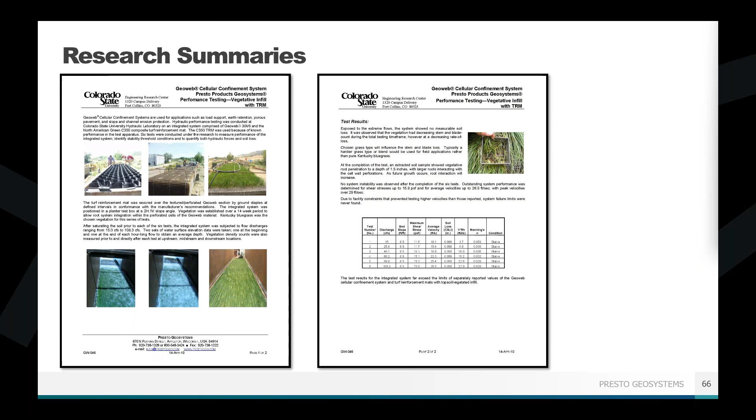Project evaluation service—I've mentioned that a number of times as well. Go to our website, you'll see something up top where it says free project evaluation. Fill in with as much detail as you have.

And then we are going to give you a written summary, calculations, CAD details, specifications, supporting documents, all of those good things. So we're going to get you this for your specific project condition so you know it's going to work for you. We're not basing this off a graph or a table and saying good luck—we know this is going to work for you and we have the data to back it up.

Like I said, you are going to get all of those documents. It usually takes 2 to 3 business days, but reach out to us if it's an urgent situation—sometimes we have time to accommodate. We're going to work with you to get the best design for your project.

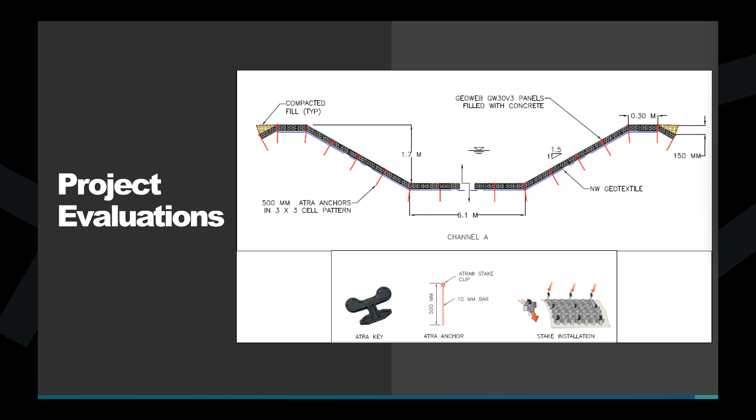And we do deliver quality and over 40 years of expertise, guaranteeing each shipment meets or exceeds our specifications, so you can deliver certainty and build with materials you can trust. No disclaimers, no fine print.